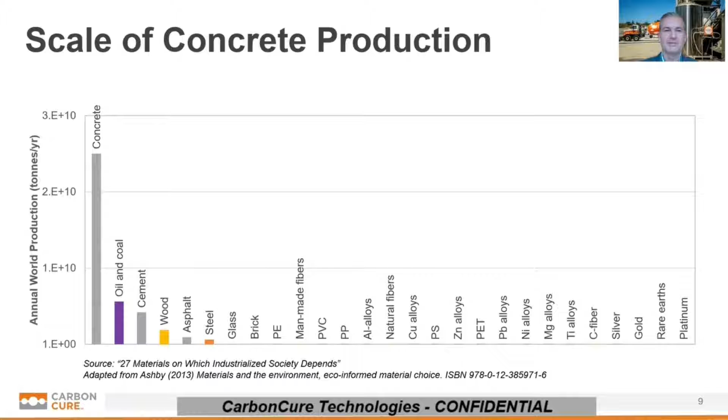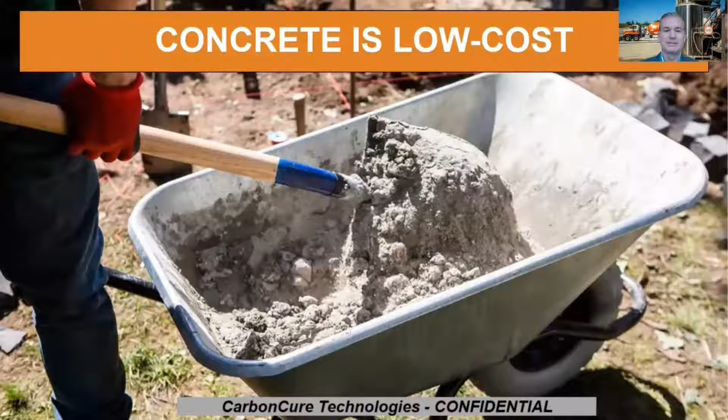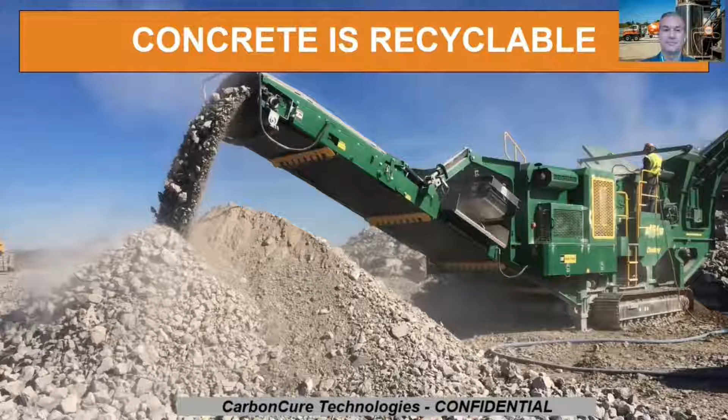So why does humanity choose concrete as a building material? It's relatively low cost. It's extraordinarily resilient. It can be recycled at the end of its life, whereas wood, as an example, cannot. It's tremendously versatile, dependent on geology, geography, altitude, weather, soil conditions, or shape. You can't get more flexible than concrete.

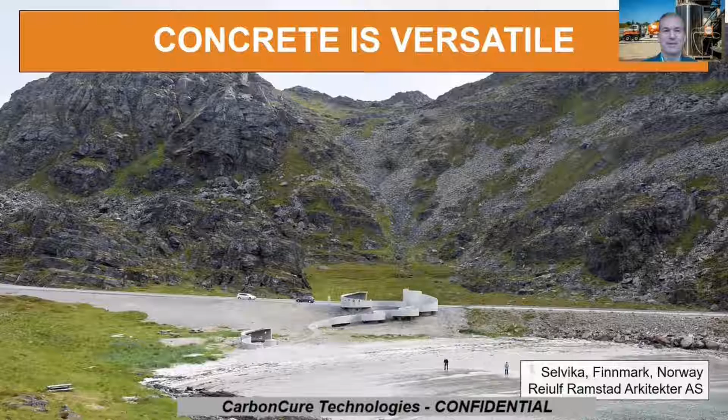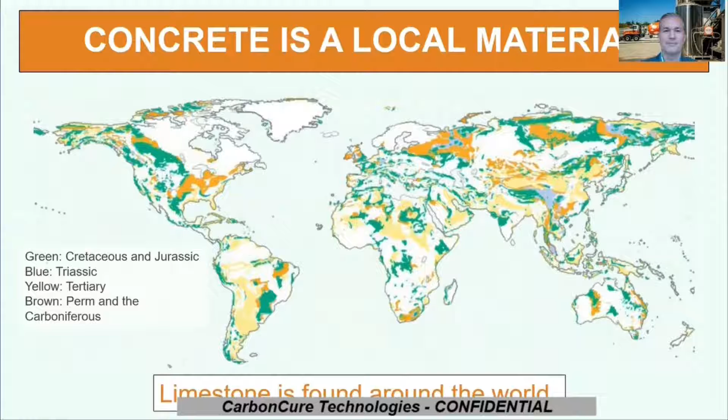And the ingredients are very local. Aggregates are everywhere. Water is relatively plentiful. And cement's raw ingredient, limestone, is frequently occurring. So our technology offering and value propositions are very nicely explained in the following video.

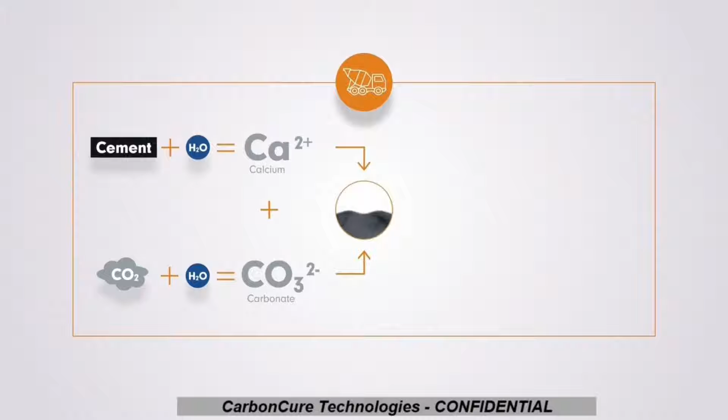CarbonCure is clean technology that allows ready-mix concrete producers to reduce costs, deliver greener concrete, and win more business. CarbonCure works by injecting recycled carbon dioxide, CO2, into fresh concrete during mixing. Once injected, the CO2 undergoes a chemical reaction where it transforms into a mineral, improving the compressive strength of the concrete, which then enables the reduction of cement content in mix designs while maintaining strength requirements.

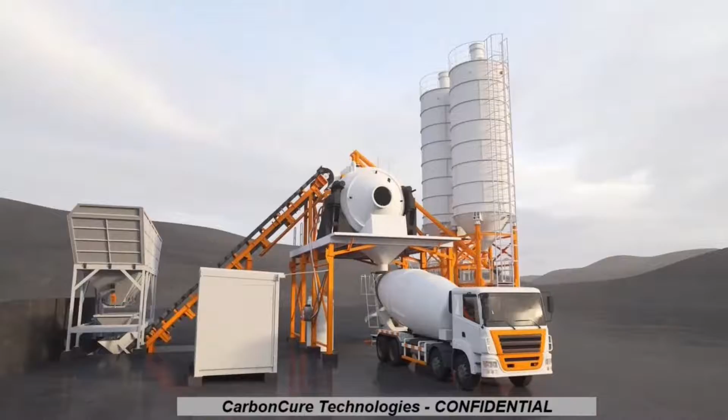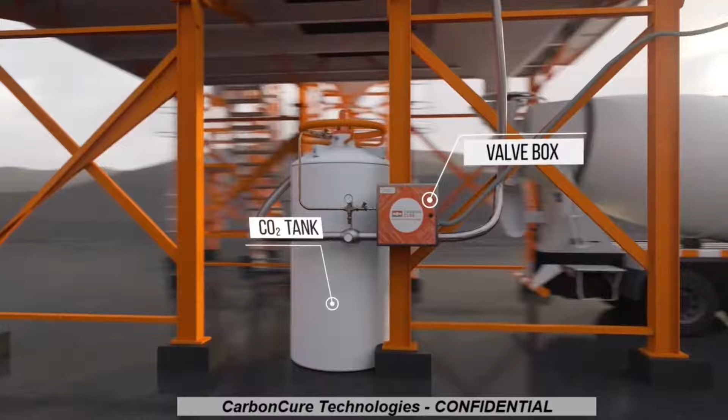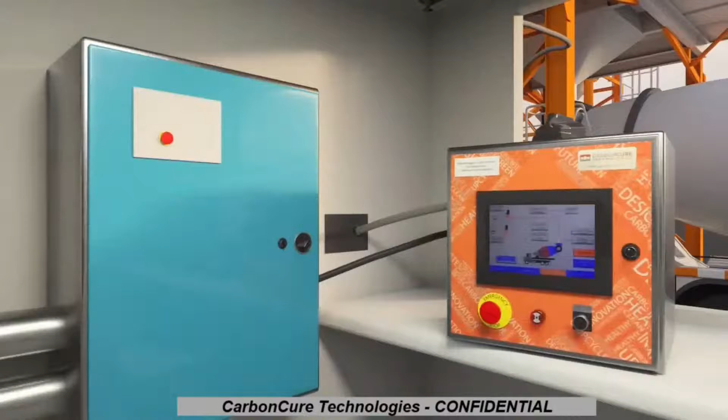The CarbonCure technology is made up of two boxes: the control box, which is the brains of the operation, and the valve box. The valve box connects to a CO2 tank and delivers a metered quantity of CO2 into the concrete mix. The CO2 is stored on site in a pressurized tank provided by industrial gas companies. The control box monitors the performance of the valve box system in real time and feeds back all usage data to the CarbonCure command center.

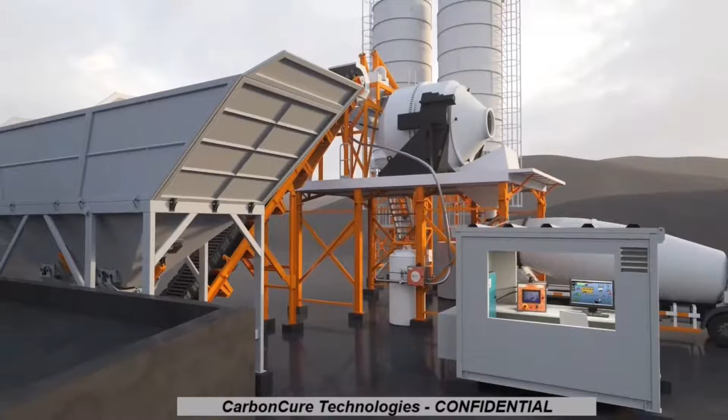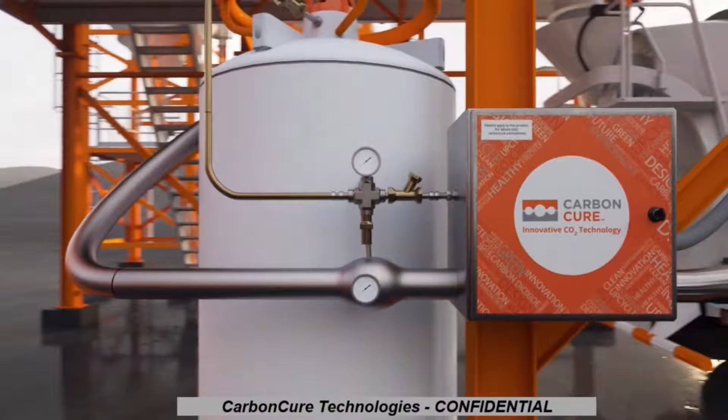The control box software integrates seamlessly with all existing batching software, so adding CO2 into a mix is just like adding an admixture, meaning no impact on batching or loading cycle time. Transfer hoses deliver liquid CO2 from the supply tank to the CarbonCure valve box, which is at the plant loading area. The valve box then meters and delivers a known amount of CO2 into the concrete mix based on the cement content of the mix. The CO2 automatically injects into the mix once roughly half the cement and water contents have been discharged.

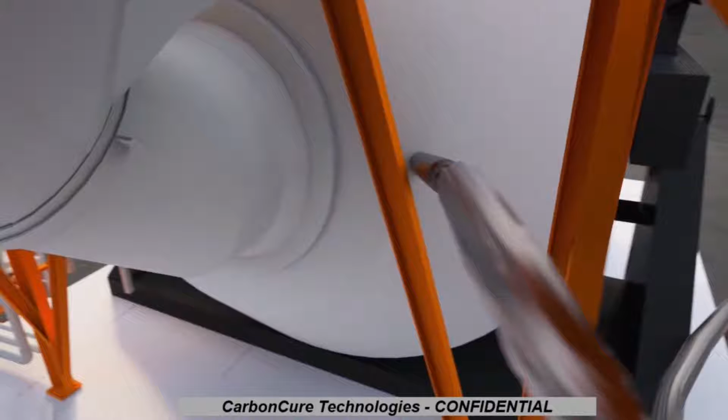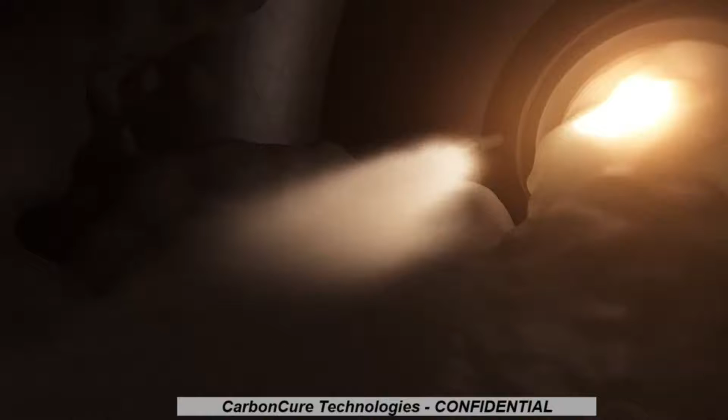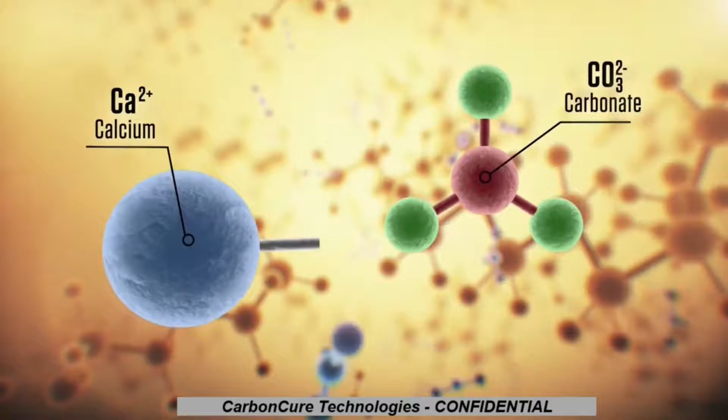While liquid CO2 is stored in the tank on site, the CO2 that comes into contact with the concrete is actually in a solid and gaseous state, similar to dry ice or snow. It changes state once it leaves the CarbonCure valve box due to a significant drop in pressure. Upon contact with the mix, the CO2 undergoes a chemical reaction and converts into a mineral, calcium carbonate, which makes the concrete stronger. Plus, what was once CO2 is now eliminated, never to be re-released into the atmosphere, even if the concrete structure is demolished.

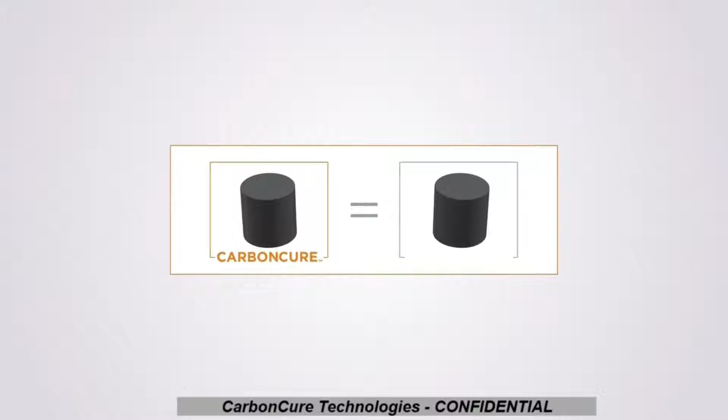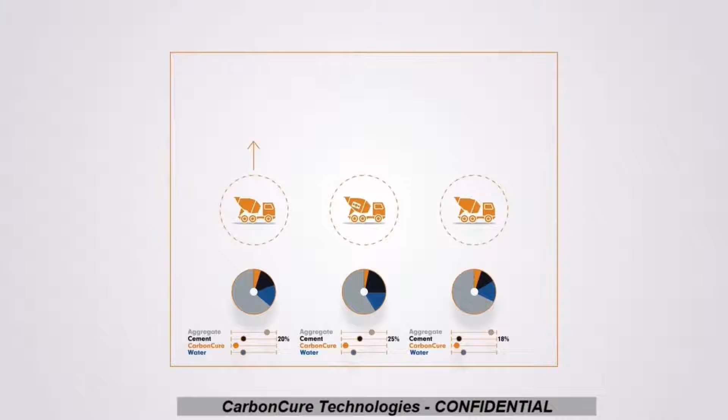Concrete made with CarbonCure has no differentiating factor from concrete without CO2 in it. Fresh and hardened properties are not affected. Any mix design can be adjusted to include an optimized dose of CO2 and a reduction of cement content without compromising the concrete strength. This means CarbonCure mixes can be used for all commercial and residential applications.

Every cubic meter of concrete produced with the CarbonCure technology saves an average of 17 kilograms of CO2 emissions from entering the atmosphere. An average high-rise building built with CarbonCure would save approximately 680,000 kilograms of CO2 emissions, which is equivalent to the carbon absorbed by 360 hectares of forest in a year. Reduced cement content means reduced costs and a reduced carbon footprint, and more business from the green building markets.

With CarbonCure, concrete producers can create a legacy of sustainability in their communities while attracting and retaining employees who want to work for an employer that does something positive for the environment. Technology costs are offset by cement savings, one-day installation of the technology without disrupting operations. The technology can be retrofitted onto any wet or dry batch ready-mix plant.

Seamless integration with your existing batching software means it's as easy to install as it is to use, all provided with the ongoing guidance and support of a dedicated CarbonCure technical services team member. Join the growing network of concrete producers who are using CarbonCure in hundreds of ready-mix plants around the world. It's simply better concrete.

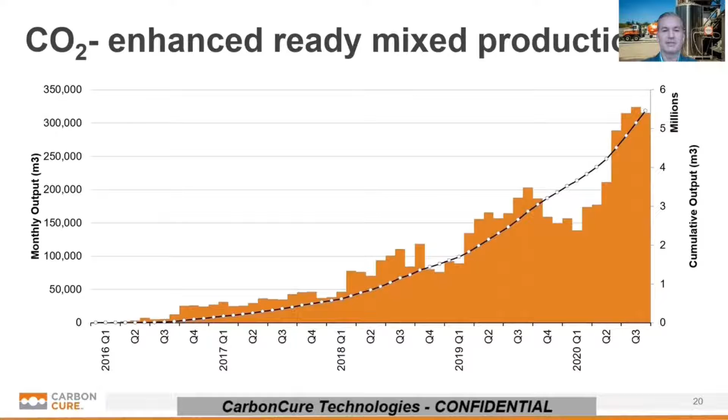We've been implicated in many different types of projects: residential, commercial, even departments of transportation are using us now on roads and bridges in the United States. It's important to note that we have been successfully used across all exposure classes and applications of concrete.

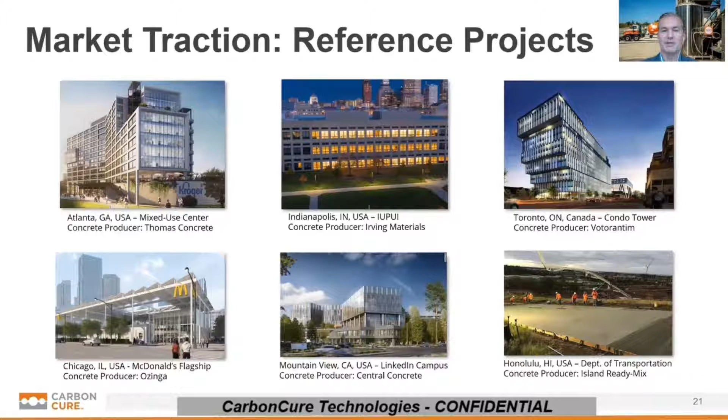The environmental benefit is now almost at 90,000 metric tons of CO2 avoided, and continues to grow every day.

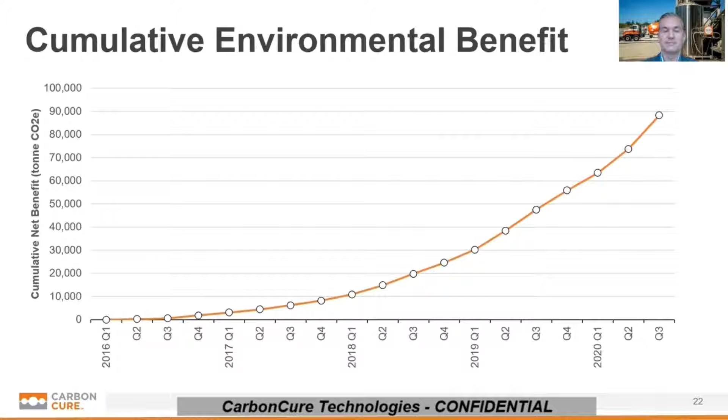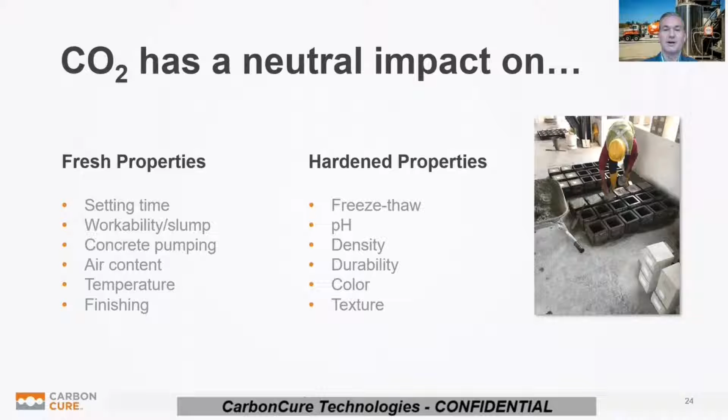So in summary, the addition of waste or recycled carbon dioxide into concrete has a neutral impact on all of the key fresh and hardened properties. So if durability is a concern, we are the same as the concrete without carbon dioxide, with the added benefit of reducing the concrete carbon footprint by somewhere between 17 to 20 kilograms per cubic meter.

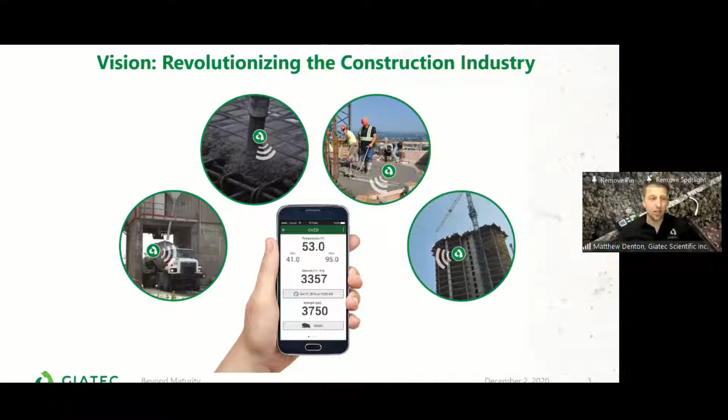Today's agenda has a couple of points that I'd like to go through. I know this seems like many points for a short amount of time, but I'll try to keep to the track. We're going to talk about maturity very quickly and very briefly. This is a concept familiar to some, not so familiar to others, and it's certainly quintessential to the conversation we're going to have today.

We'll talk about how we can save time using this method. But more importantly, today is really about how we can make a change in the environment. If we're working a little bit smarter, there's certainly a lot of things we can do to improve our carbon footprint as a construction industry in the world today.

Concrete maturity - we're going to talk about cold weather energy savings, a little bit about Giatec behind the green logo, and then, of course, I think one of the things that really is a hot topic nowadays is artificial intelligence, and how we can apply that to concrete.

If we have time, I'll present a little bit of a demo on some of our software. But if we don't get to that, that's okay - I'm always available to set up a presentation for those who wish to have one.

So if we jump into the first topic quickly - what is concrete maturity? Concrete maturity is another method that we can use to measure concrete strength. At the moment, there are three main methods out there in the market to monitor concrete strength. First, we can do field cured samples or specimens, whether it's a cylinder or a cube in your market - that can change from market to market.

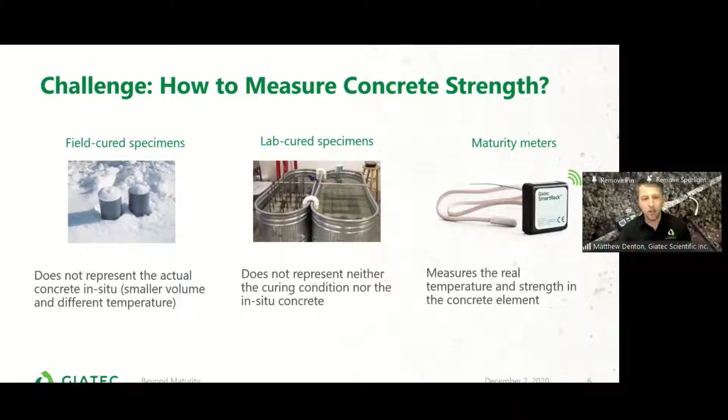Many of the limitations here - and I'm not going to spend too much time on this - with concrete cylinders or cubes, depending on your industry, is that we don't really have an accurate representation of the concrete conditions. There's sometimes delay in results. There's also limited information - when we're just taking this one sample, it's only giving us a snapshot of what's happening in that concrete. And of course, there are local variations.

One of the challenges we see around the world as well is the quality control of these samples. They're so significant, yet minor differences can have such a huge impact on the results you get from those samples when you send them to the lab to be crushed for results. And of course, this gives us very low visibility of what's really happening on site.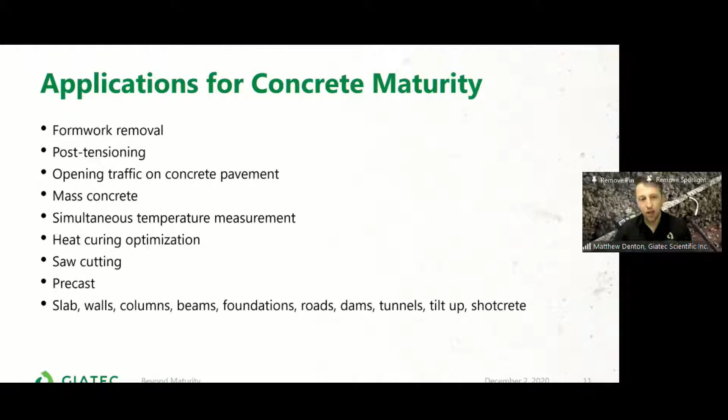If we talk about the time savings regarding this, and we're talking about the bigger picture of saving time on a program, saving time on a schedule, let's have a look at a quick comparison between when we're using the maturity method versus when we're using our standard sample collection and compression data.

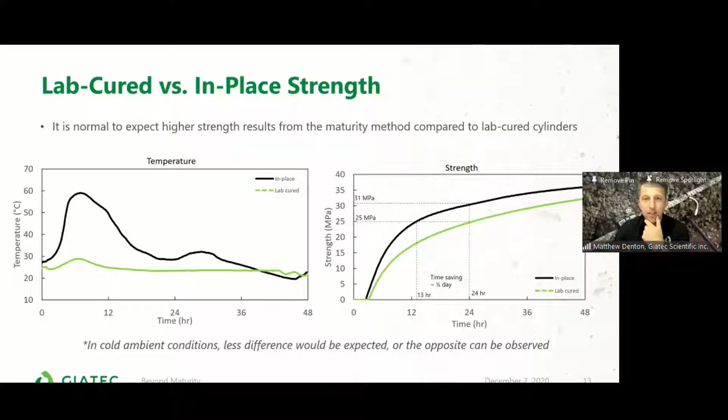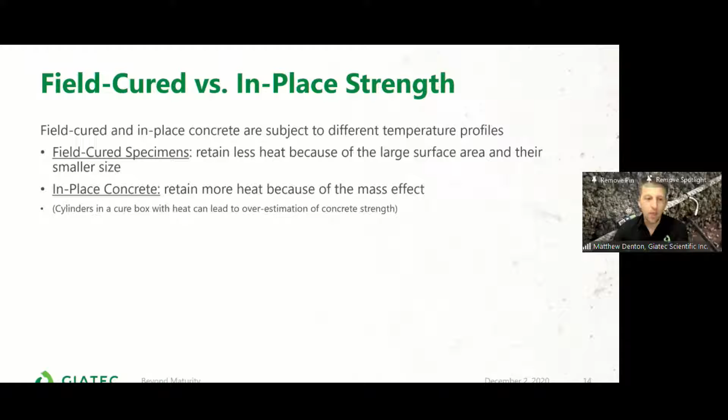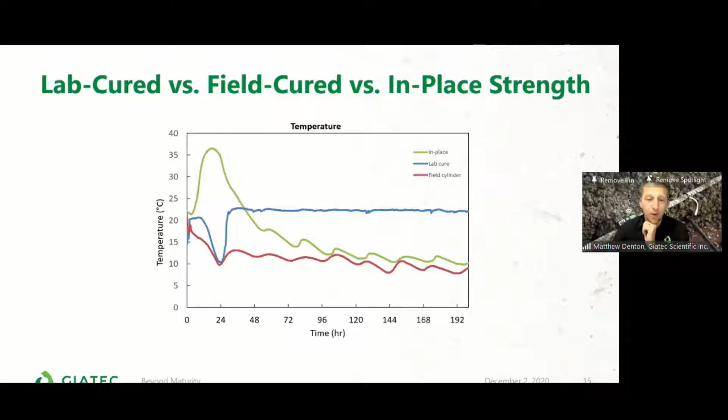All right, I'm going to jump forward a little bit here, I don't want to spend too much time here. So again, if we do a quick comparison, we look at this scenario where we have this spike in the early temperature gain on the in-place concrete, shown in our green line. Our blue and red lines are samples that are taken. The red line is the sample of the cubes kept on site. So we can see quite a difference in the maturity line.

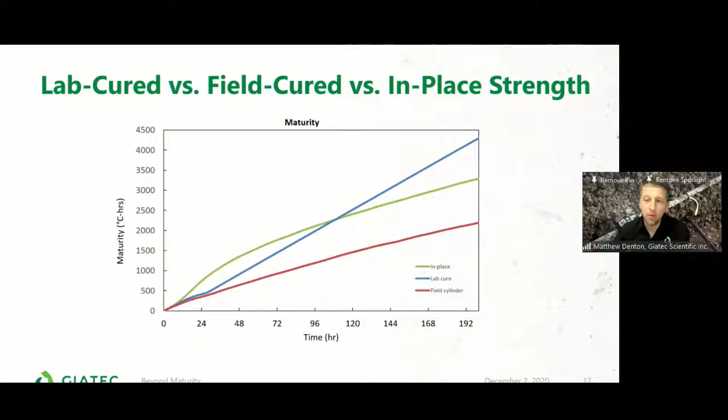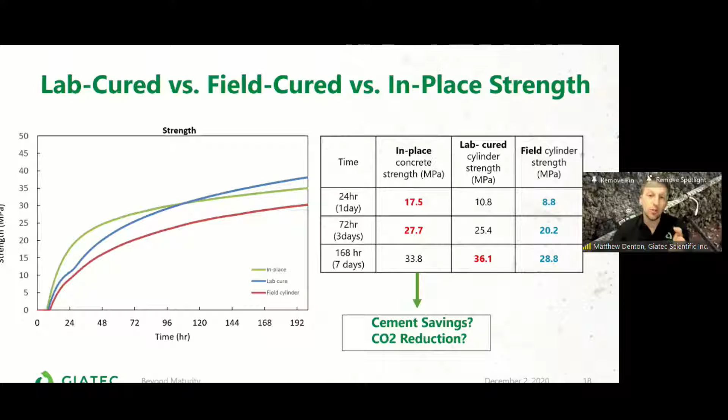So the question we have to ask here is that if that is telling us a different story to what our samples are telling us, where can the cement savings come in? What can we do to reduce our CO2 if this is the case? Oftentimes, we're over-designing our mixes to be safe. We're over-designing our strength on our concrete mixes to make sure that we cover ourselves because we're using a method like crushing samples, like crushing cubes, as an indicative sample of what should be happening on site.

And we know the liability, the issues around that are always a big factor. And therefore, we're always adding that extra safety factor. We're always over-designing our mixes just to be 110% sure that we're hitting our strength. But with the right data, with the right information, with real-time data, we are able to make a difference, have an impact on the amount of cement that we need for our standard concrete mixes.

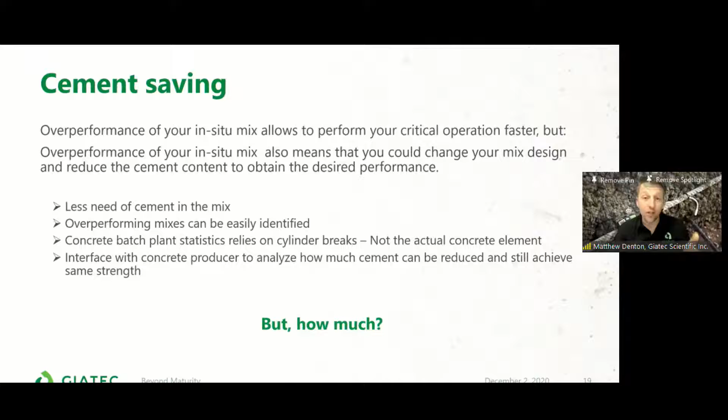Now, I'm going to say my colleagues from Canada in CarbonCure, they're doing some amazing work with putting that CO2 back into the concrete, and it's incredible. And I'm very excited to see them growing so rapidly around the world, because really those are the companies that are going to make a big impact in the long run here.

And from our side, the information is what we believe and where we come from. And we've spoken about IoT and information and collecting of real-time data. This is where we see that we can have an impact here. With the right information at our fingertips, we can make smarter decisions about the concrete that we're using on site. You've heard all the facts, you've heard all the information about how cement has such a major impact on our CO2, that is such a major contributor in the market in Indonesia.

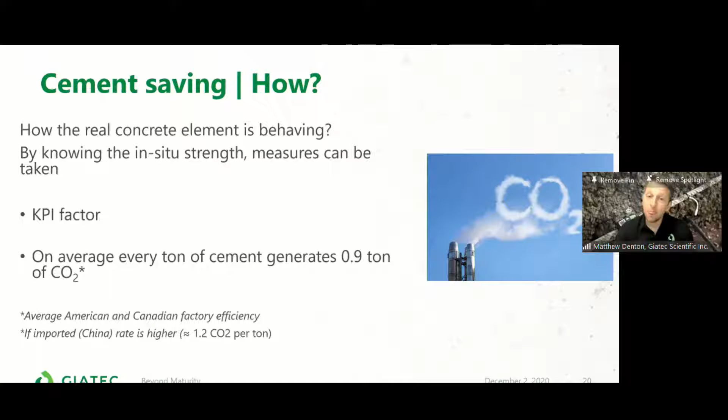And let's have a look at a particular example. I'd like to jump straight into this. And this is a post-tension deck for a project that we were involved with. We had a look at the scenario and we said, okay, let's take the project. Let's see what we could really do here. And this is now becoming a very common trend for us. We see this again and again in our customers. So there was a design strength of 40 MPa. However, the target strength for the post-tensioning was 20 MPa.

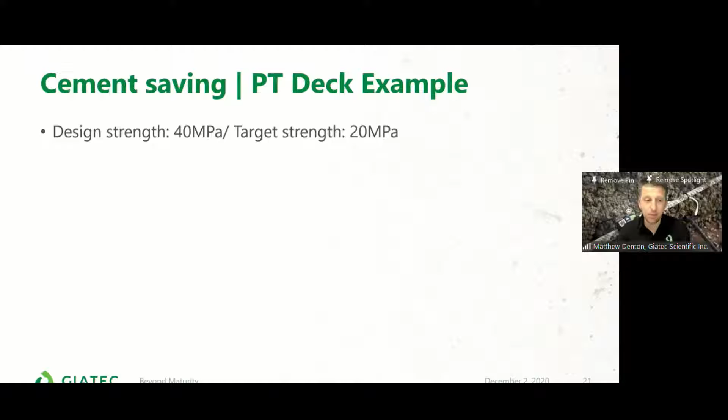So if we break this down, we look at mix one, we look at the mix proportions that we had, the kilograms per cubic meter of cement, the kilograms per cubic meter of water, and what that water cement ratio was. Fairly standard mix, not too complicated here. And the 3 days target strength that we had was 20 MPa. And when we actually started reading the information from the concrete sensors, our SmartRock sensors that were placed in the concrete, we realized that there was actually a 4 MPa difference between the target strength that they were aiming for versus the actual strength they were achieving on site.

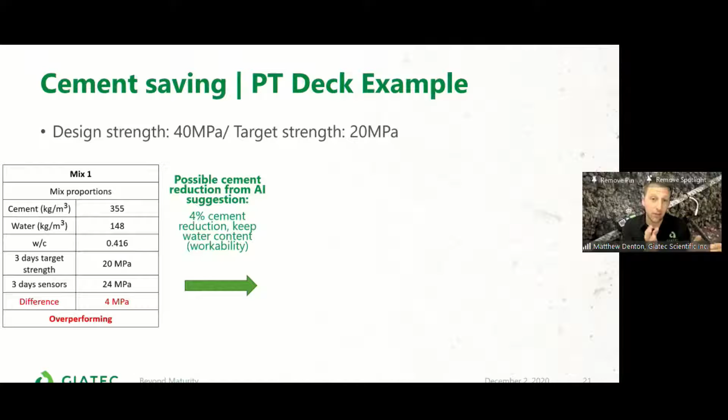What did this allow us to do? This allowed us to put this information into our system, into our AI, into our 360 dashboard, and our AI was able to spit out the information that we could actually reduce the cement by 4% and keep the water content. So we kept that workability. We didn't want to affect that, but we wanted to see how we could reduce the cement that was actually put in here.

This allowed us to actually come out with a different cement value of 340 kilograms per cubic meter. Our water stayed the same. So our water cement ratio changes just a little bit there. However, now our target strength, or at least the strength we were actually reaching on day 3, was 22 MPa. So we're about 10% above the target strength, which gives us a good performance versus that overperformance that we were expecting.

What did this result in? At the end of the day, we could reduce the actual cement required per cubic meter. So it's a very basic equation. We could say, okay, so from 355 to 340, we reduced 15 kilograms in 500 cubic meters of concrete.

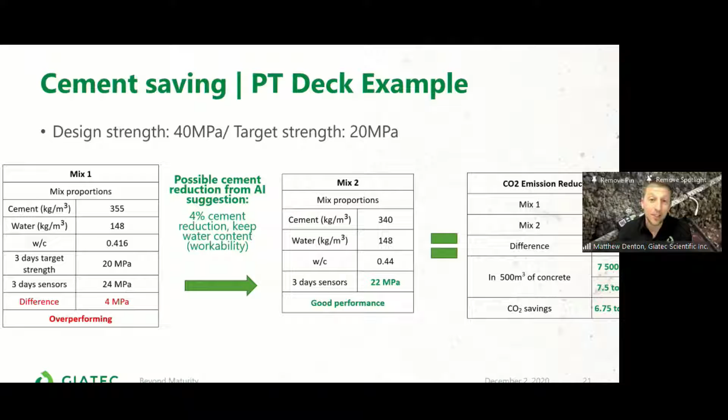That worked out to be 7.5 tons. And of course, in that scenario, we're talking about a 6.75 ton CO2 savings. When we go to the entire project, this particular project where we did this scenario, we had 15 floors or 15 stories. We had 2 pours per story. The pour volume was 500 cubic meters. The total volume was 15,000. This resulted in a savings of 225 tons of CO2.

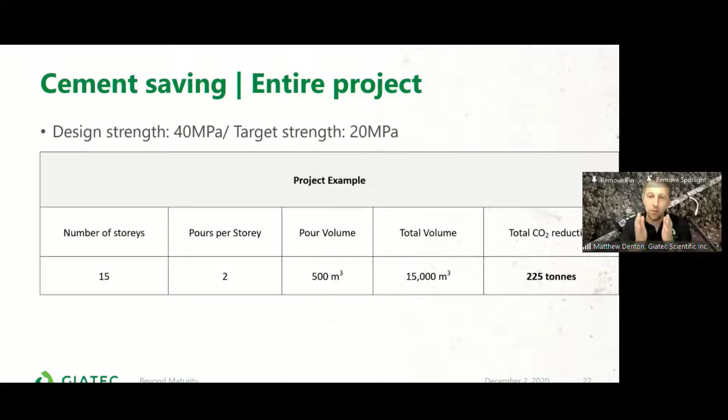Of course, this is a fairly theoretical calculation, and there's many other factors that have an impact here. But that's the straightforward savings we could bring to the party just from being more efficient and economical in our cement usage. When we take this a little bit further, and I want to show a couple of slides here very quickly, when we start thinking a little bit bigger, again, this is a very rudimentary, possibly, way of thinking, but I'd like to point this out. My colleagues here who are going to talk about carbon upcycling, recycling, and CarbonCure, what they're actually doing, taking the CO2 and putting that back into concrete, it's incredible.

But when we look at the whole life cycle of the concrete, one of the things that we see as a huge factor here is actually collecting these samples, transportation to lab, breaking these samples. Here we're talking about cylinders, but in the Indonesian market, we know that common practice is cubes. I've just had a conversation with one of our bigger projects in Europe, and they've done a calculation on the amount of cubes and samples they have to take for the project. We're talking about hundreds of thousands of tons of concrete that are going to be spent on just samples. So our vision really is to make small changes here and there where we can reduce these unnecessary requirements on site when it comes to concrete testing.

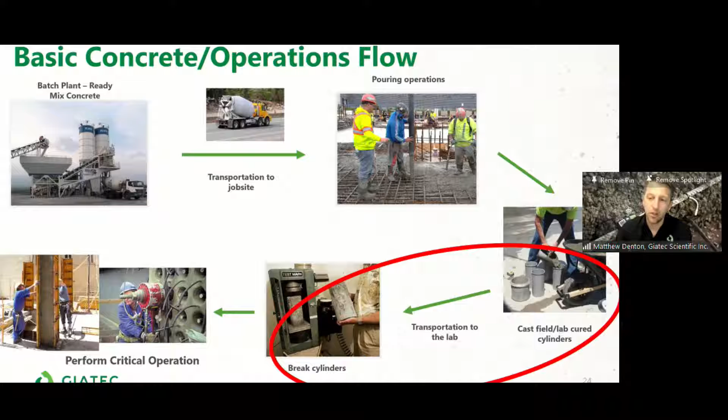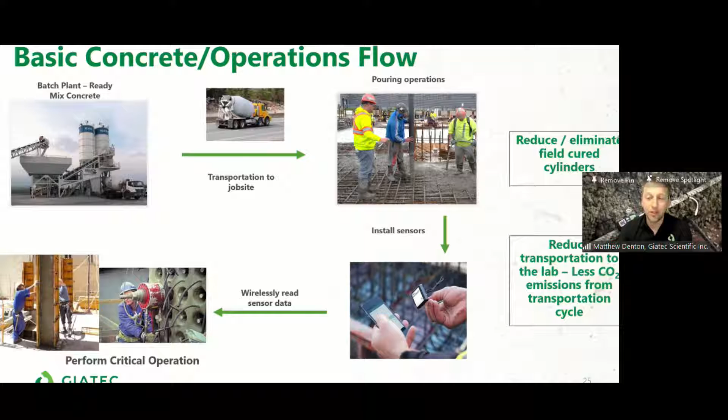And this is the bigger picture: we can replace that whole scenario of having to take all those samples, taking them to a lab, crushing them at a lab, with smart technology like our SmartRock, for example. So on the bigger scale, as rudimentary as it may be, we can reduce the number of samples that need to be taken, we reduce the number of trucks and transport needed to get that sample to the lab, and of course the cement as well.

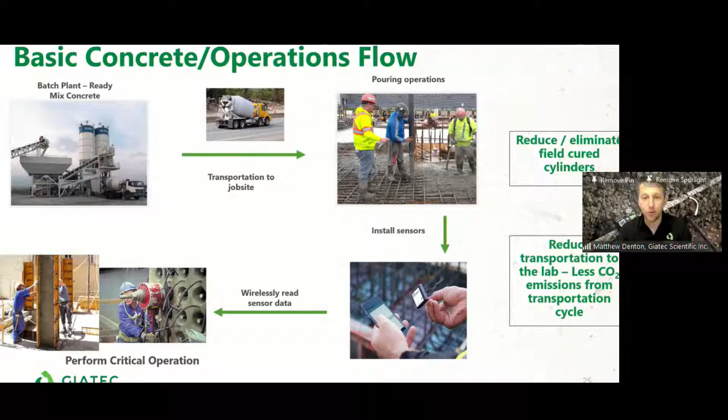I'd like to give another example here, and it's part of the same project that we looked at. There's a lot of information on these slides. This presentation will be available, and I'm happy to share this as well. But if we just look at saving the number of samples that are currently required on site, oftentimes we're taking early age strength samples to know if we can either tension the deck or strip our formwork. These are all factors that play a big role here. At the end of the day, if we can reduce the number of samples taken, we can look at how many cubes we could save.

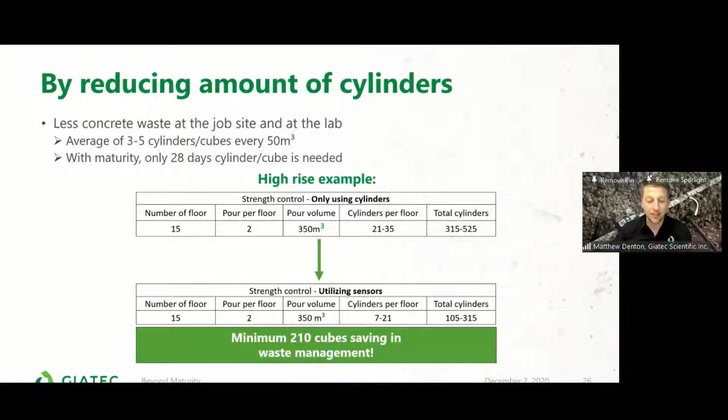This particular scenario is slightly different. We looked at the number of cubic meters of concrete, the standard requirement for how many cube samples are required for the project, and how many cylinders or cubes were taken per floor. On your standard testing scenario, you're talking about 21 to 35 per floor. As soon as we start utilizing maturity sensors and that smart technology, we are able to reduce that. On just this one small 15 floor project, we're talking about 210 cubes saved. Not cubes of concrete, but actual samples. If you're working on site as an engineer or contract manager, the logistical nightmare of dealing with those 210 cubes is a big problem. And that's something we're very proud to be able to reduce. All right.

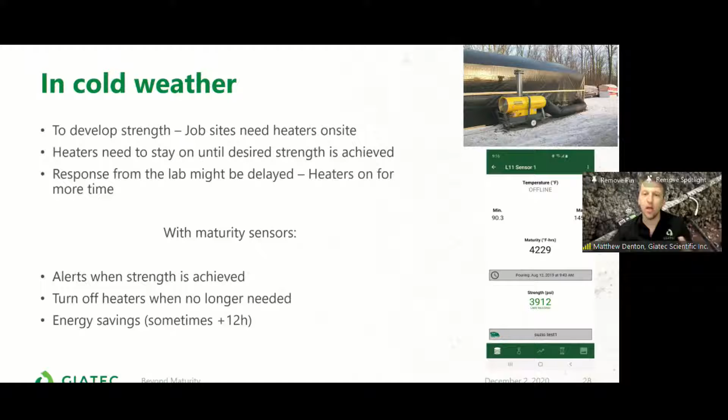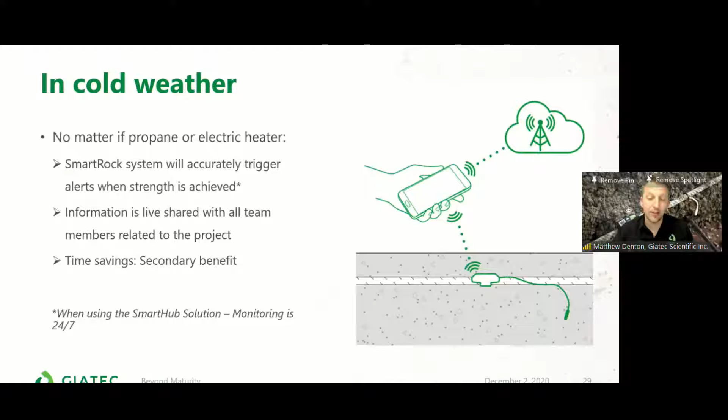And again, this is where our sensors, we're monitoring that temperature in real time. This allows those on site to make more efficient decisions about how to control the temperature on site, what external impacts need to be applied there. Again, I mentioned this very briefly, but if we talk about cold weather, our SmartRock is accurately monitoring the temperature, allowing us to really be able to effectively monitor that concrete so that we can make the right decisions on site for our concrete.

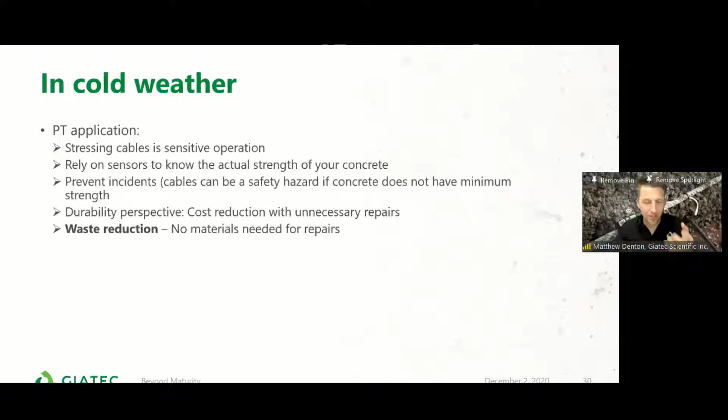Again, I'll share this as well, in cold weather, especially when we talk about post-tension, stressing cables is a very sensitive operation. We need to rely on accurate data, accurate information to be making the right choices there. And then the last topic that I want to touch on, and I'm going to be running out of time before the moderator kicks me off here, is if we talk about broadening our mindset a little bit beyond maturity.

You have 1 minute. Thank you. That's perfect. That's all I need. I'll be very quick.

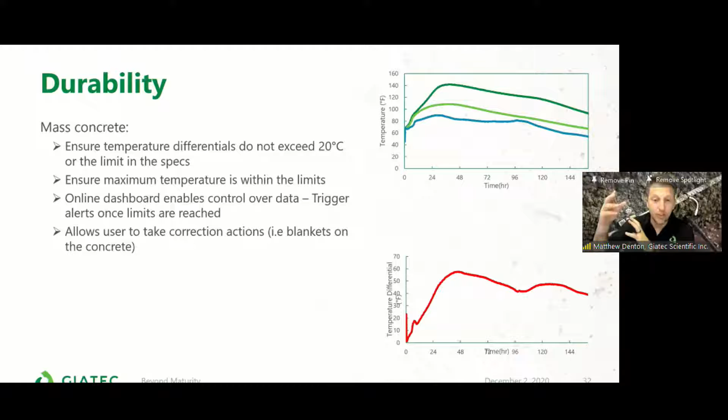Thank you, Mr. Matthew Denton. It's very interesting about the testing that will give us the effectiveness of the method. We hope that the method can precisely detect the reduced carbon in our concretes. Okay, we will save our questions until the third presenter.

So the third presenter is Mr. Ryan Bourns from Carbon Upcycling Technologies. Mr. Ryan is currently the Business Strategy and Development lead for Carbon Upcycling Technologies. He has been with the company for 2.5 years and came to the company following the completion of his Sustainable Energy Development Master's degree. Ryan focuses on the commercialization strategy for Carbon Upcycling's core technology and products, while also exploring new regulatory opportunities and initiatives. So the time is yours, Mr. Bourns.

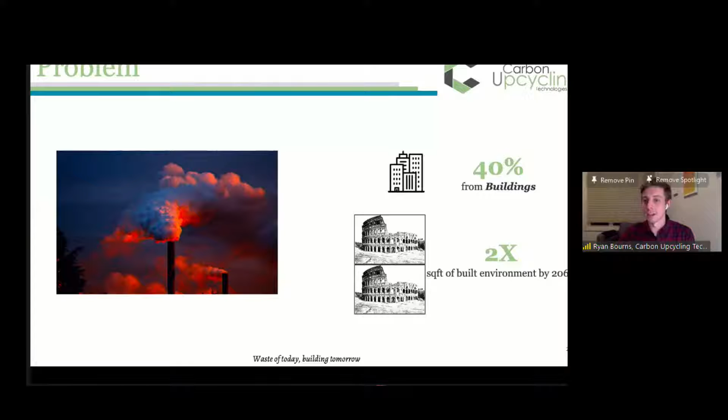And over the next 40 years, we're going to be doubling the square footage of the built environment. So if this is an issue today, it's going to be an even bigger issue in the future. So we wanted to develop a technology that could utilize the point source emissions to improve the materials and hopefully reduce the impact of those materials that go into the buildings industry.

And so we've done this with a patented carbon utilization process where we take gaseous CO2 emissions and chemically absorb that CO2 into inorganic raw feedstocks. So these could be materials like I've described here, either fly ash or talc, or other industrial waste like steel slag or crushed glass.

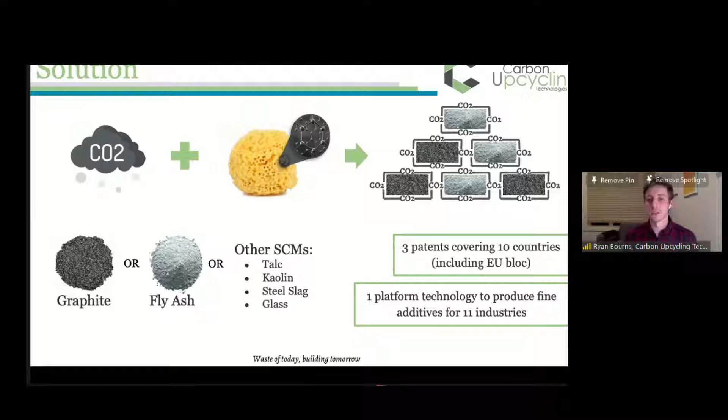So we use that material, like that fly ash, to act like a sponge where it's soaking up CO2. But at the same time, we are exfoliating the surface of it, which starts to resemble something like that sponge there, where there's more surface area and more pores within the fly ash. And the main outcome from that, and the most important thing for our work, is the fact that this creates basically a supercharged, more active surface area for when that material is used in a concrete mix.

So this process that we have actually lends itself to a few different industries where we can create advanced materials to be used as industrial additives in the coatings industry, in the polymers industry, with nylons. But of course, I'm gonna speak mostly to our work in concrete today.

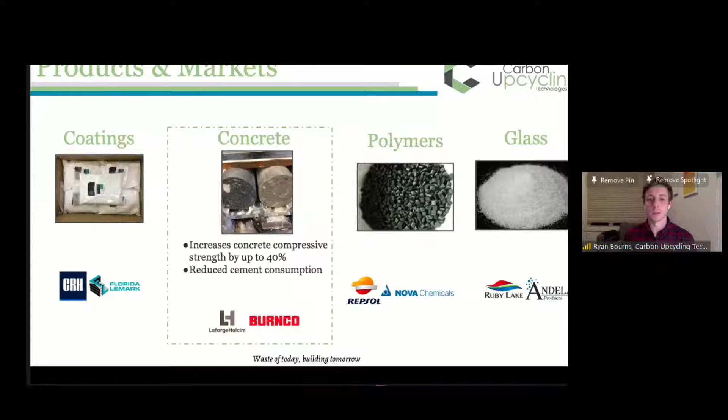So this is something that we've been working on for probably the last 3.5 years, specifically in the concrete industry. And we've been able to demonstrate that with our process, our enhanced fly ash, as we call it, can increase the compressive strength of concrete by up to 40%. And of course, this means you can further reduce cement and reduce the embodied carbon associated with that material. And this is something that's been validated with partners around the world, like Lafarge Holcim, and more locally to us, a local company called Burnco. You'll see them in a picture later on, probably.

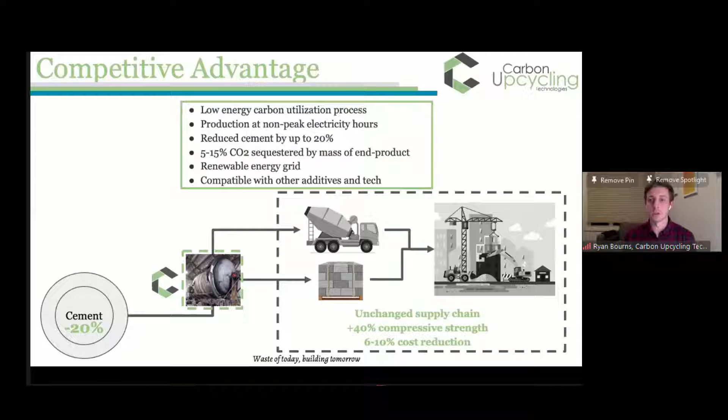This has allowed us to show that we can reduce cement by up to 20% in a standard mix. And in terms of how much CO2 we're actually getting into that fly ash, it's between 5 to 15% by weight of that end product. So for every ton of fly ash that we have, there's between 50 to 150 kilograms of CO2 stored permanently in that fly ash.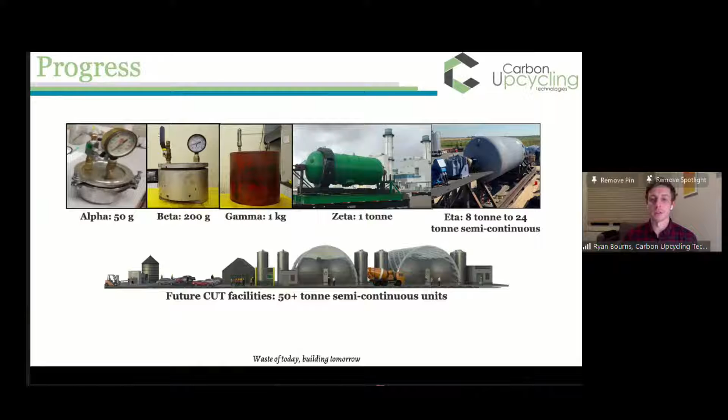This is something that we've scaled up over the last few years to the point where we went from something the size of a cookie jar to our most recent reactor, which produces about 8 tons per day. And here's a couple more pictures to describe this. This is something that we have at our demonstration facility in Calgary. And as I mentioned, we're producing about 8 tons of product per day at this point.

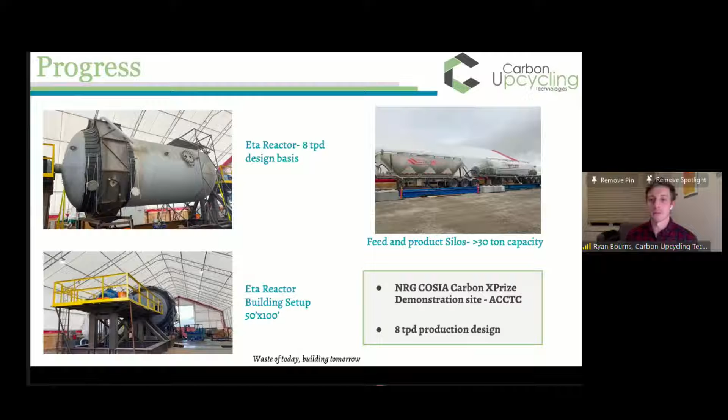Now, as everyone's probably quite aware, there's a few regulatory hurdles to get into the concrete industry. And this year, after getting our production capacity scaled up, we also went through the necessary regulatory testing that showed that our material is suitable for concrete applications because it resembles fly ash in every sense of the word, except for the fact that it improves performance, both from a compressive strength perspective and from a durability perspective. So because of this approval, we're now just getting into commercial projects.

And as I mentioned before, because of the enormous increases in strength that we're showing, we don't need projects to be 40% stronger than they're specified for.

As Matthew mentioned, there's a very thin margin that you can work within, and 40% is way above that. So what we really want to show is that because of that strength improvement, we can really reduce the cement that would be associated with it. And this is something that we're still working on and optimizing with our concrete partners.

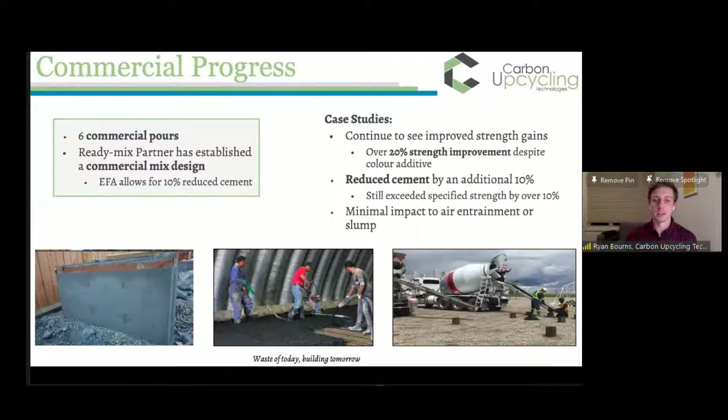But really what we've shown here is that we can keep all of the necessary considerations for concrete the same, whether it's air entrainment or workability, but with improved strength and reduced cement. And this is something we've shown in these commercial trials. Just to give a bit of a visual representation of where we are with our facility.

We're basically in the backyard of a natural gas power plant. So we take the waste CO2 emissions from that power plant and bring that into that large vessel that I had shown you a couple slides ago. And so we're doing this all on site and then sending the product that we create, our enhanced fly ash, to our partners, our local ready mix partners, for them to do their commercial projects.

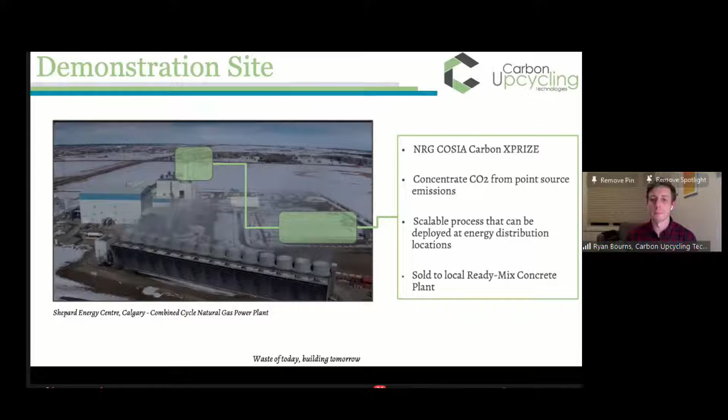But again, this is something that we can do either on site with waste CO2 emissions, or in a less centralized opportunity with delivered CO2 as an option as well. And I'm just going to end off my presentation here, showing a little bit of our international traction. I know we have a handful of commercial projects that we've been involved in, but because of the ubiquitous nature of this material and the impact that it has around the world, we've seen a lot of attention in the last little while for our technology to deploy it into different strategic locations.

So a few partners that I would like to give mention to here. We recently announced a partnership with CEMEX Ventures, their group in Europe. And what they're looking for is for our technology to improve and perhaps bring new supplementary cementitious materials into the market. This is something that we've shown with other industrial waste products, where we can actually make them a suitable material for implementation into concrete. So again, we're reducing cement because of this, but we're also using more waste. We're creating that circular implementation. So we're excited to get those projects underway with all of the different SCMs that we're looking at.

We will also be taking part in a European funded project, again looking at CCU, or carbon capture and utilization, for a cement company. And recently we have been working with IHI, the large Japanese consortium, and we're co-evaluating some opportunities for our technology to work with their different business units. And of course, IHI has an enormous presence across many countries in the Asia Pacific region, and so our technology has relevancy to a lot of their different markets and industries.